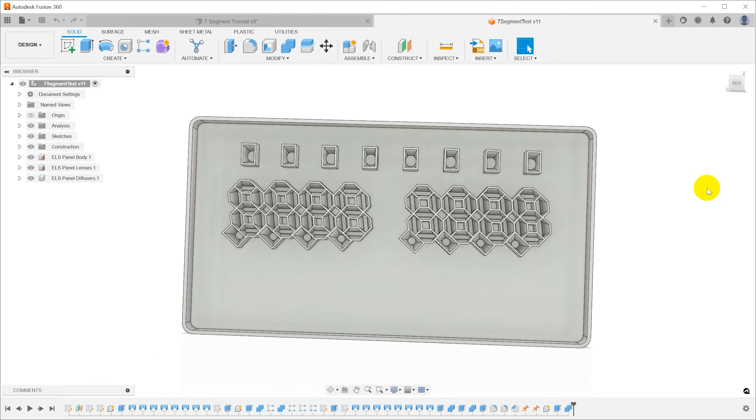Today we're going to take a deep dive into Fusion 360 and I will show you how I designed these 3D printed 7-segment display panels.

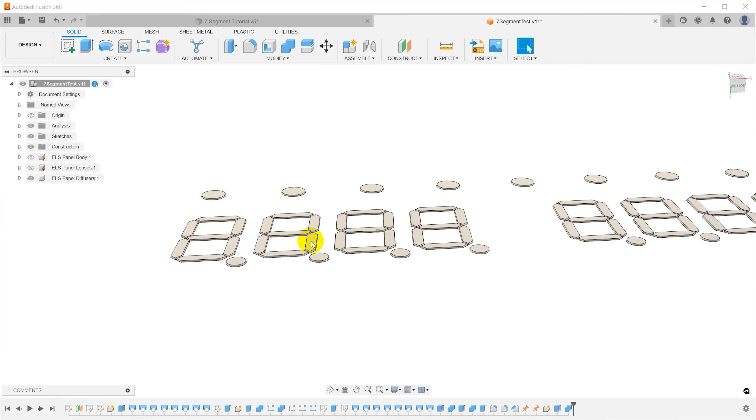Last week I spent some time testing the Bambu Lab A1 Mini 3D printer and I used these display panels as a challenging test to see what the printer could do. These panels have 3 different materials: black PETG for the body of the panel itself, clear PETG for the lenses of the 7-segment displays, and a single layer of white PETG behind that as a diffuser. This was not a simple part to model, and in the video last week I completely glossed over that process, but today we're going to look at how I did it step by step. Stick around and maybe you'll learn something interesting.

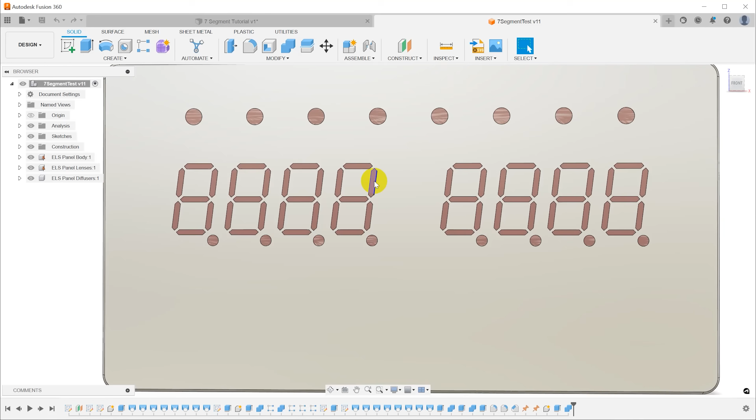This is the part we're going to model, and we need to first establish a bunch of geometry. We're going to need a sketch to lay out the segments of the digits, and we're going to need a sketch to lay out the shields on the back. It's a pretty complicated sketch, but we'll start with the simple core of it and add the complexity as we go.

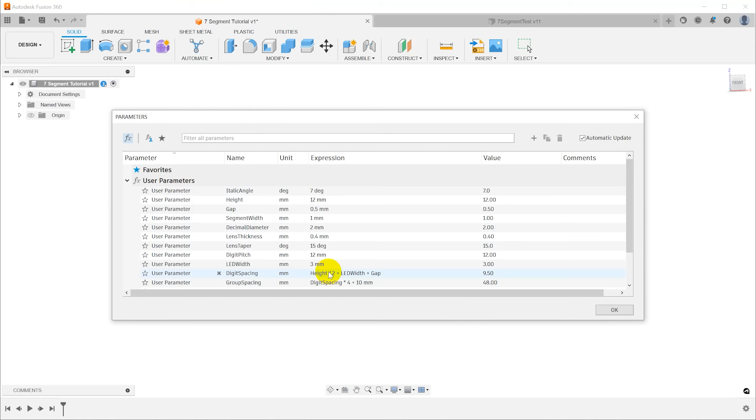The first thing I did is I defined a bunch of parameters. I want to be able to come back later and change the size of the digits or maybe the angle of the digits. So I've got the italic angle in here, 7 degrees. I've got the height of the digit, 12 millimeters. I've got the gap, that's the gap in the corner between the segments, set to 0.5 millimeter. I've got the segment width of 1 millimeter, and then a bunch of other parameters we'll use later in the modeling. I worked through this once and figured out what these needed to be, but I did it progressively, starting with just the angle, height, and gap, and adding more as I went.

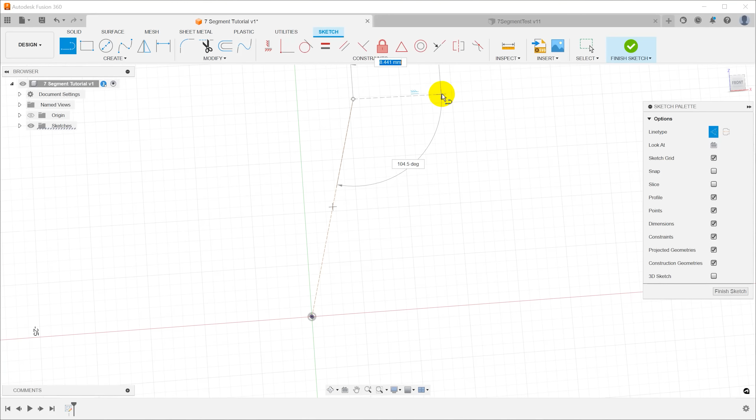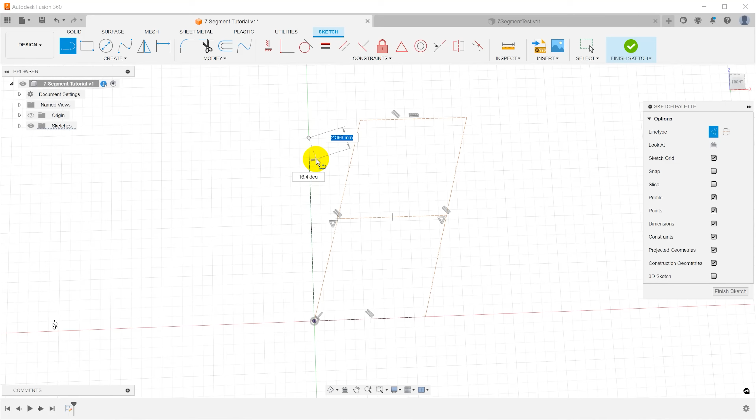So let's start with a sketch and set up the basic shape of the digit. I'm going to hit L for line, X for construction, and draw the shape of the digit. As I move this back and forth, you can see it snaps into position with a parallel constraint, making those lines appear parallel, so I don't have to come back and add that constraint later. Now I can find the midpoint and draw the center line across, snapping to the midpoint, and now we have the basic shape of the digit. I'm also going to put in a vertical line here, hit escape to stop drawing, and start putting some dimensions on this.

So D for dimension, and the first thing we'll set up is the height. Then I want to make the width half of the height, so height divided by 2. And the italic angle we can set between this vertical line and the side of the digit. Now we have the basic shape. Of course, I can come back here and modify the parameters at any point. If I decide I don't want 7 degrees, and I want, say, 9 degrees, I can just change that and the angle will change. I'm going to leave that at 7 though.

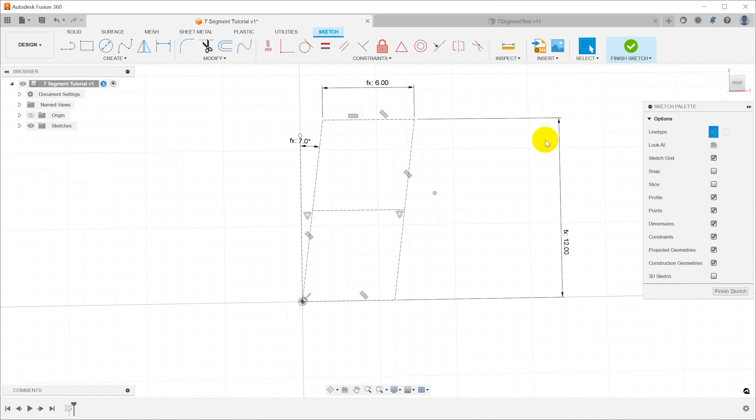I think that looks nice. And now we need to define the borders of the segments. So I'm going to do that with the offset.

Hit O for offset. Chain selection is turned on. So if I select the outside of this, it's going to offset at some distance. I'm going to turn off the construction line, so this will be solid.

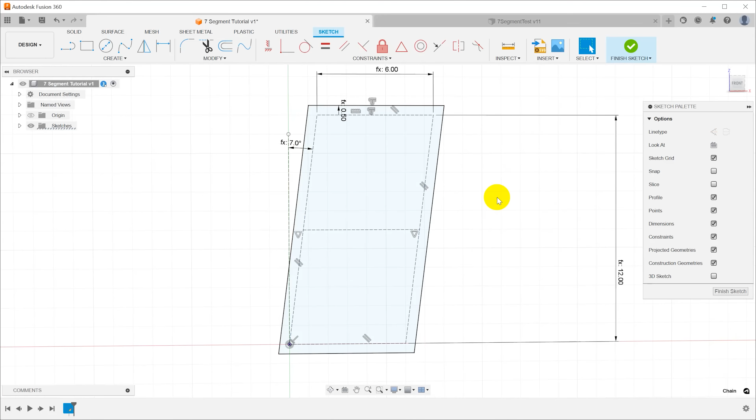And then the distance that I want is going to be the segment width divided by 2. And I will offset to the inside minus segment width divided by 2. And that gives us the width of the segments.

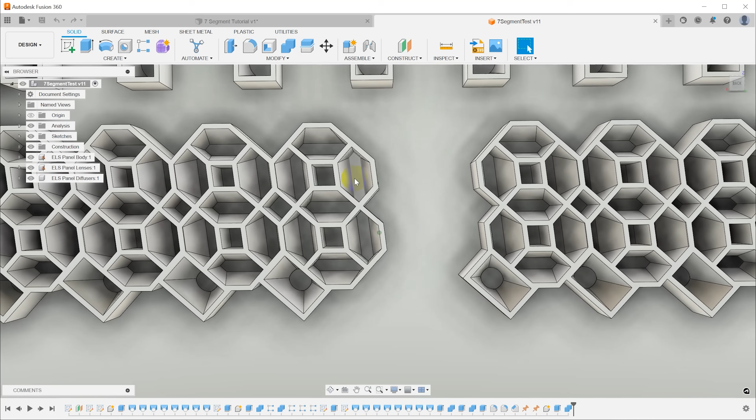Now there's more going on here, right? That gives us the inside and outside lines of these segments, but there's more than that. The segments through there, I need the inside and outside width of the pocket for the LED. And then I also need another border even further out from that to cover the thickness of this wall.

So we'll go ahead and add those. Offset again, in this case, the LED width divided by 2. Offset minus LED width divided by 2.

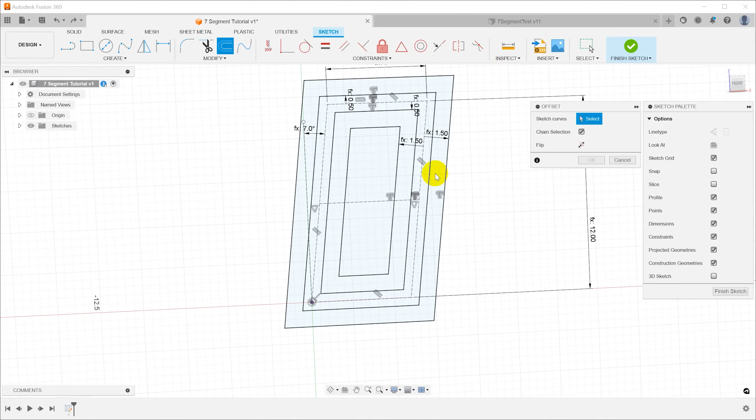And then we need the wall out beyond that. So that will be O for offset, LED width divided by 2, plus the gap. And offset the other direction as well, minus LED width divided by 2, minus the gap.

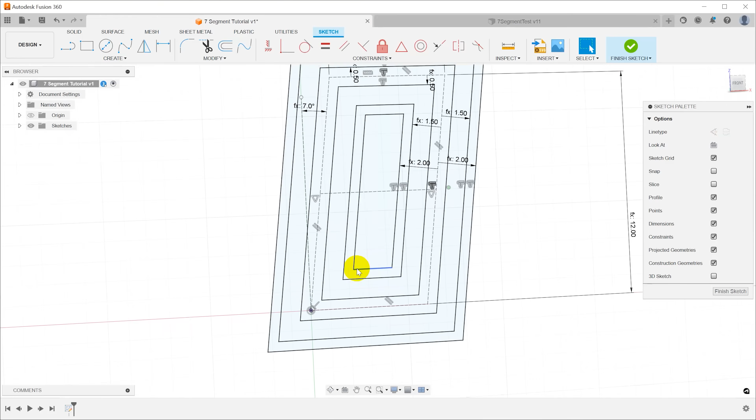And that gives us all of those borders, at least around the outside. We also need them on the inside here. So I'll do exactly the same with this center line, offset.

Okay, that gives us all of the borders. Now around these segments, we need to draw in these diagonal lines that will give us the gap.

And we'll start with just some construction lines. I'll hit L for line, X for construction, and we'll just go corner to corner across these guidelines that we started with.

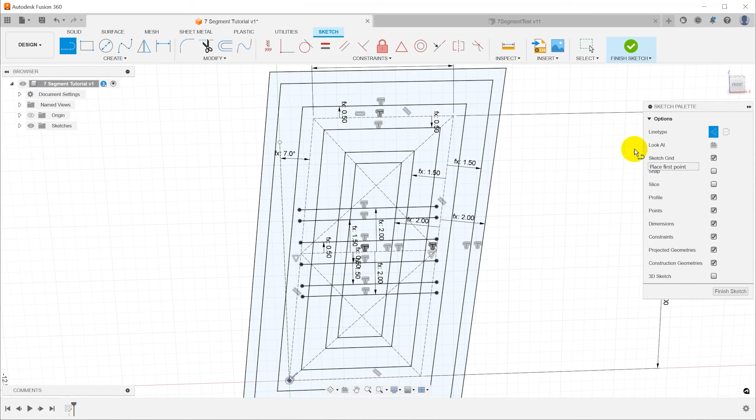And then we need to offset from those half of the gap on each side to then define the segments. So we'll turn off the construction, offset, gap divided by 2, minus gap divided by 2. I'll just do this for all of these lines.

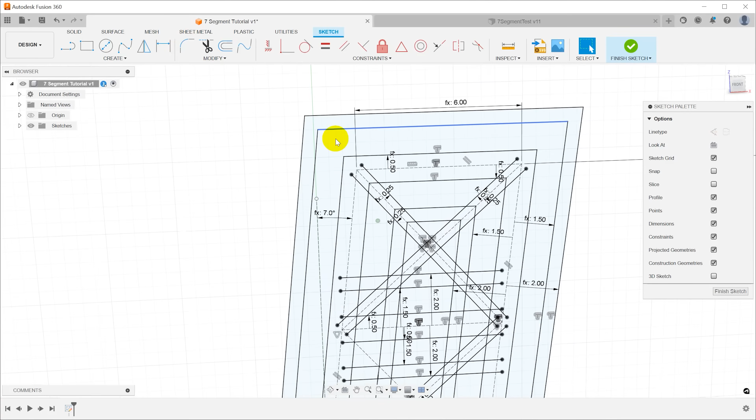Now this is starting to get really messy, but don't worry, it's going to get even messier. So we need to define the other side of these segments, and to do that we need some points. So I will say create point, and I'm going to come in here and put these points where the corners of the segments will be.

So where these gap lines intersect with the center guideline. Now it looks like I missed a couple.

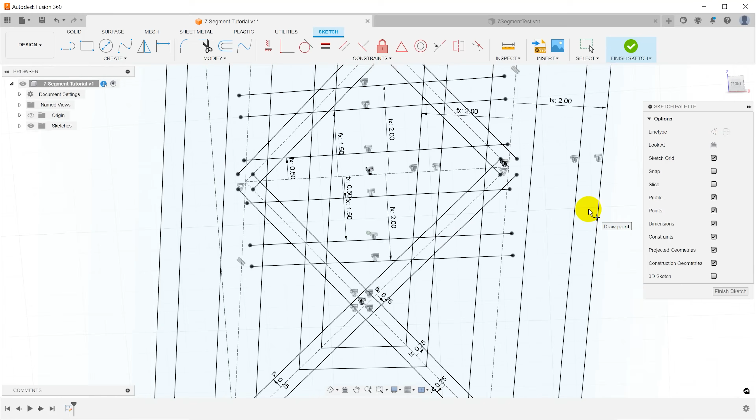And now I need to come back and define the other side of the segment. So the segment is in this region here, and there needs to be a line across here. So hit L for line. And what I'm going to do is I'm going to pull it all the way out to here because I know I need it to come this far.

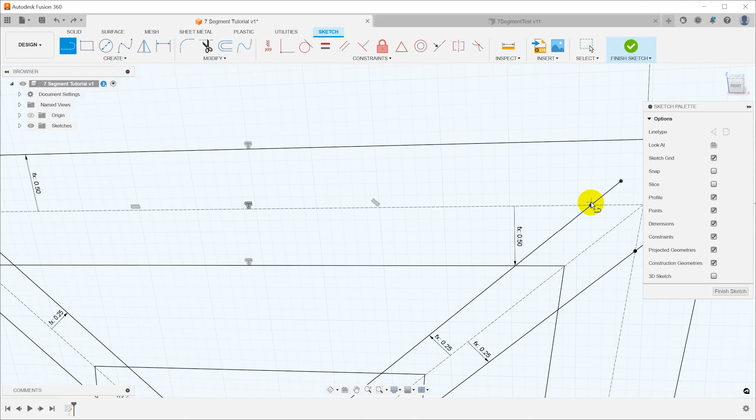And I'm not snapping it parallel to anything. I want to come back and do that later. So I'll just go ahead and put all of these in.

Okay, I think that's all of those. And now I'm going to come back and click on the parallel constraint, and I'm going to bring all of these lines parallel to these center guidelines. And I put them in there without any constraints initially, just because it's so hard to get them to snap to the right other line in something that's this busy.

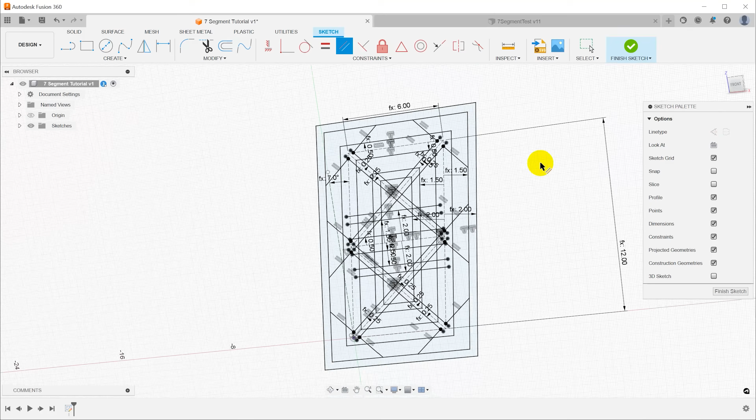But when we come back and do this after the fact, we can be selective. And the last thing we need is an outer wall, just like we've got this outer wall that's going to go around the outside of the pocket for the LED. We need to define this line that's on the outside edge of this wall. And we're going to do the same thing, just put it in without any constraints, and then we'll come back and constrain it.

Okay, so we'll say parallel. And then we'll hit D for dimension, and we'll offset this from here, the gap. And do that all the way around.

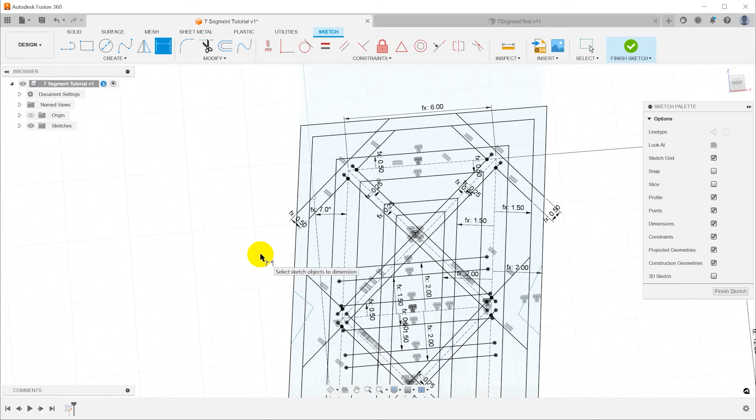Now for these lines that cut in on the side, again, that's these two lines right here. Fortunately, we know those need to line up with the inside ones, so we can just use a collinear constraint. And I can just click those and line those up quickly without any measurements.

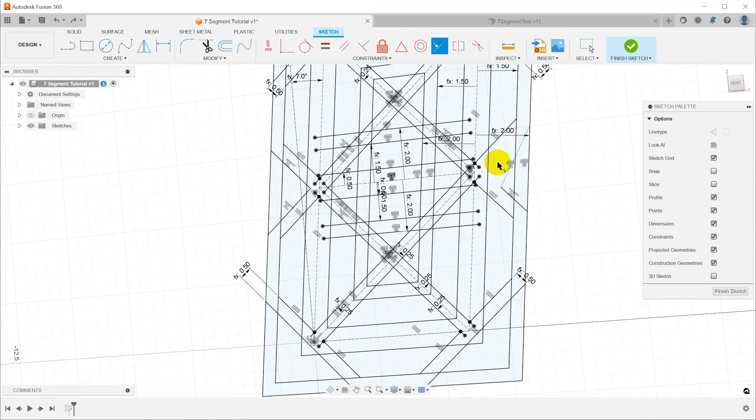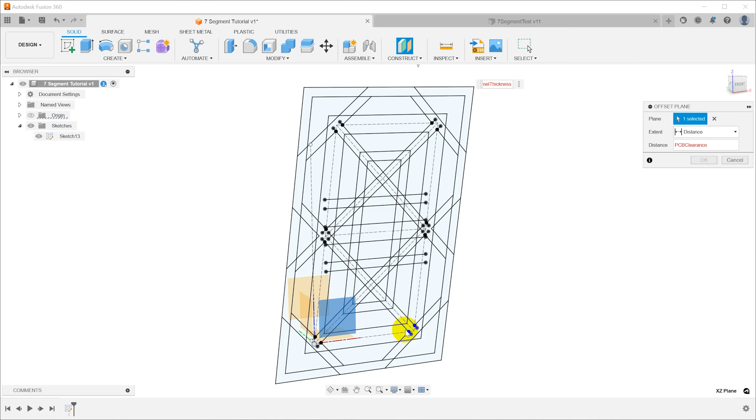Now that we have this completely unwieldy sketch with everything in it, let's create some simpler sketches and just project some of these lines into it to make our job easier. I'm going to start by creating another plane, offset by the PCB clearance plus the panel width and panel thickness, which creates another plane on the back. The sketch is on the front plane, and this second plane is the back end of these extrusions.

I'm going to create a sketch on that back plane, hit P for project, and we're going to project some of this geometry back there—not everything, just the outline that we actually need to extrude.

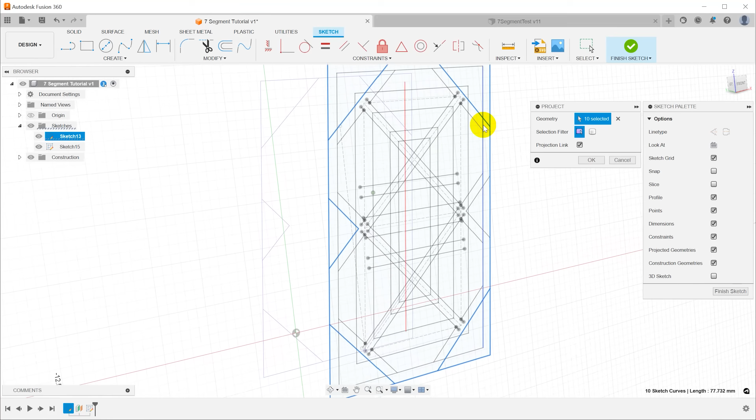Okay, that's one sketch. I'm going to hide that one and create a second sketch back there as well, and project more geometry onto this second sketch.

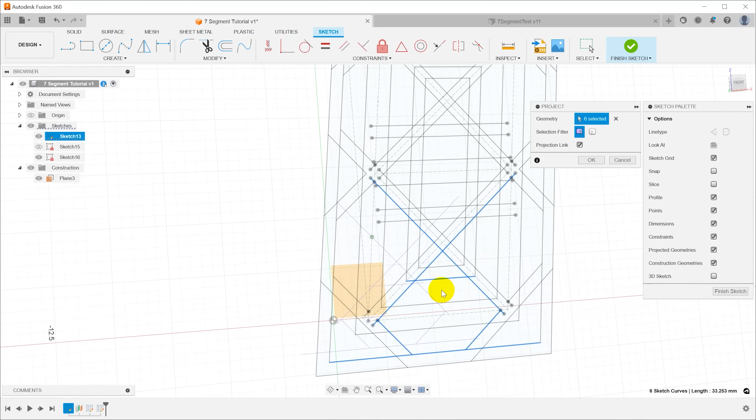Specifically on this second sketch, what I'm projecting is the geometry I need to carve out the holes for the LEDs. And I think that's everything I need for that.

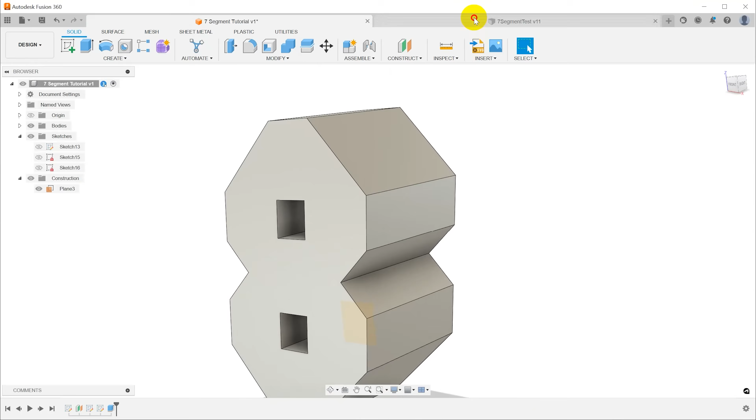Okay, so let's turn on just this back sketch. I'm going to select the regions here that I want to extrude, control-click, hit E for extrude. Extent type, I'll say to object, click something on this front plane, and if I turn the sketch off, you can see that extrudes a solid block of plastic, which is the material that's going to completely surround these shrouds on the back.

Then if I turn the front sketch and that third sketch we did on the back on, that gives me everything I need to loft the openings. So this is a segment on the front, and on the back this is the opening for the LED.

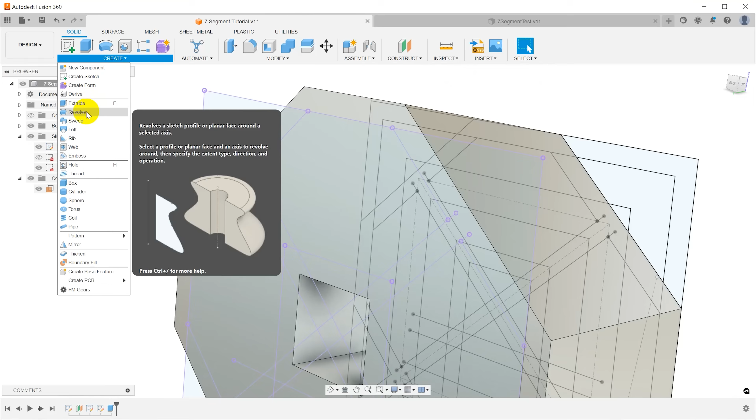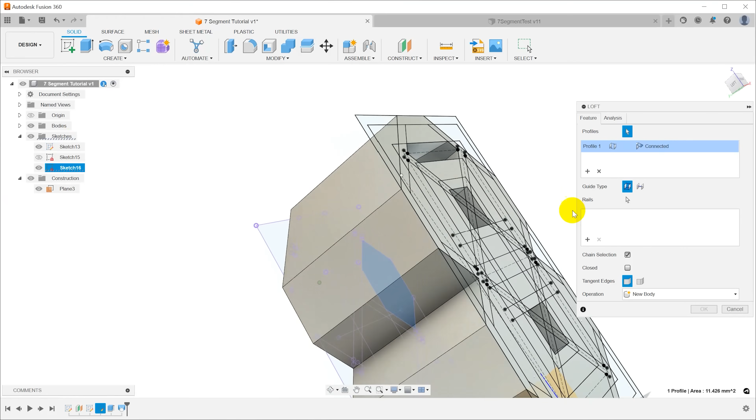So I can come up here and say create, loft, select the segment on the front, the opening for the LED on the back. It'll default to cut, click OK, and it will carve out that tapered opening from the front to the back. Then I can just go through and do exactly the same thing again, lofting from the back in this case to the front, and we'll go through and do all of these.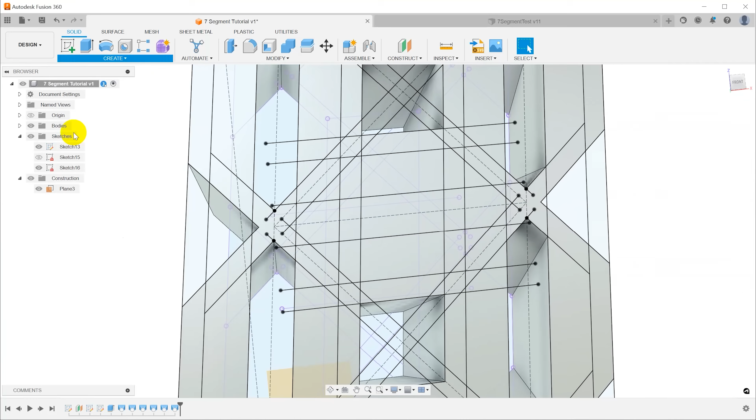Now the one in the center is a little bit more complicated because of all the extra lines in here—there are a bunch of different profiles. So I'll start and say create loft, click one of these profiles, and you see it's created a single profile here in the loft command. Now I'll hold Control and click the rest of the profiles I want included on the front side, and you can see there's still only one profile.

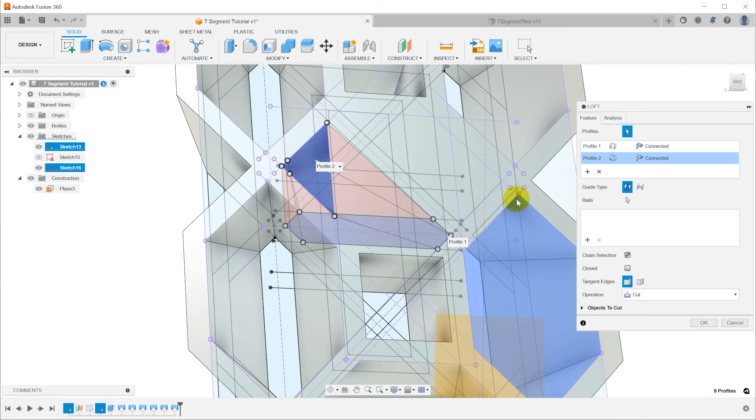Then we'll flip around to the back, and I will not hold Control—click, that will create a second profile. Now I'll press Control and select the rest of the profile, release Control, click OK, turn off the sketches so you can see what's going on, and that has carved that segment through to its LED pocket on the back.

So we have all 7 segments carved through the back with these tapered openings, and that's exactly like what we have on the back of the finished panel here. Well, that was by far the most complicated part of the model, and the rest of it should be relatively easy.

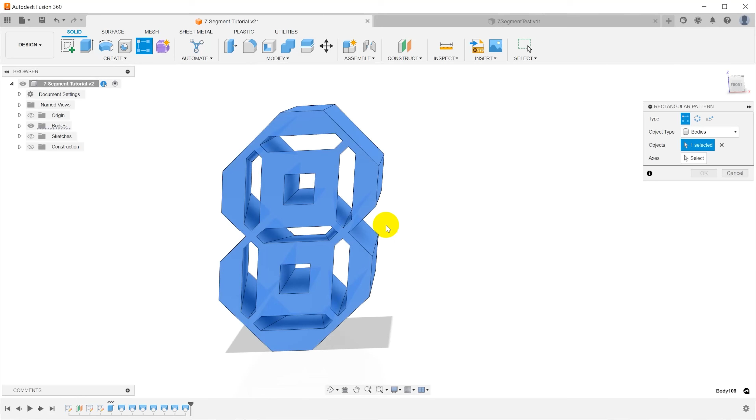So I don't want just one digit, I want 8 digits in 2 groups of 4. I'll come up here and click rectangular pattern, pattern bodies, select this body. On the axes, I'll select this bottom line because I know that's horizontal—actually, instead of that, I'll go ahead and select the x-axis here.

And I want to distribute these by spacing. I want 4 of them, and the distance should be the parameter I already calculated, which is digit spacing. Okay, and that gives me 4.

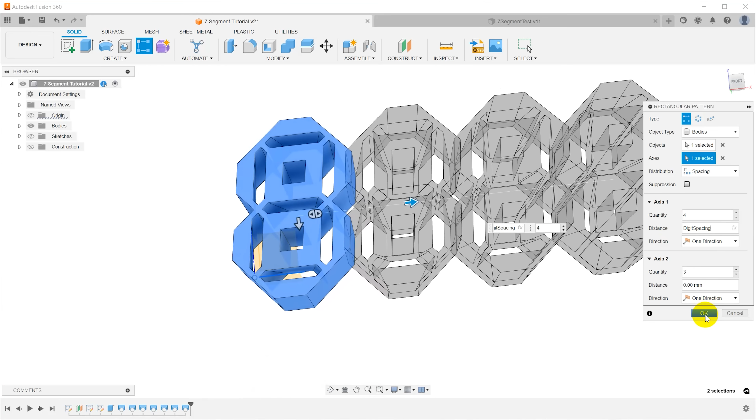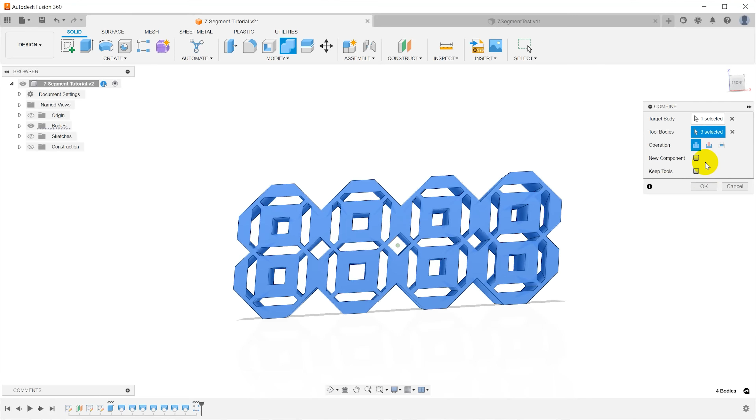Now these are separate bodies—you can see they're overlapping right here at the wall. So to join these together, I'll click Combine, Target Body, select the first one, Tool Bodies, select all the rest of these, and I want to join. I don't need to keep the tools. Click OK, and now we have a single body with 4 digits.

If we come over here and look at our bodies, there's only 1. So I can do exactly the same thing to make another group—object type bodies, select this body, axes, we'll select the x-axis. In this case, I want 2 of them.

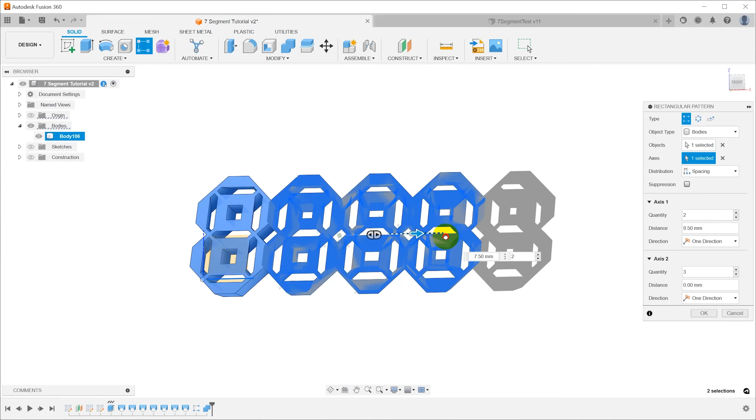And I'll just drag that over. I think I have a parameter for that, but it doesn't really matter. So there are 2 groups of 4 digits each.

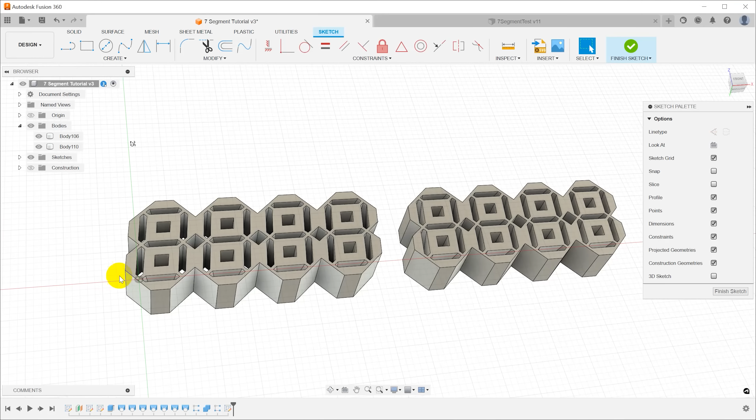The next thing I want to do is put these into a panel, and to do that, I need a sketch. So I'll say create sketch, and I will select the front of this. Now I do need the geometry here, so I'll hit P for project, and I'll click on the front faces of both of these so that the geometry will be included.

That'll allow me to do fun things like creating a line. So hit L for line, line type construction, and I'm just going to draw a diagonal line across between these, and that way I'll have a midpoint here, and I can drag up that midpoint and just hit escape. We'll use that here in a minute.

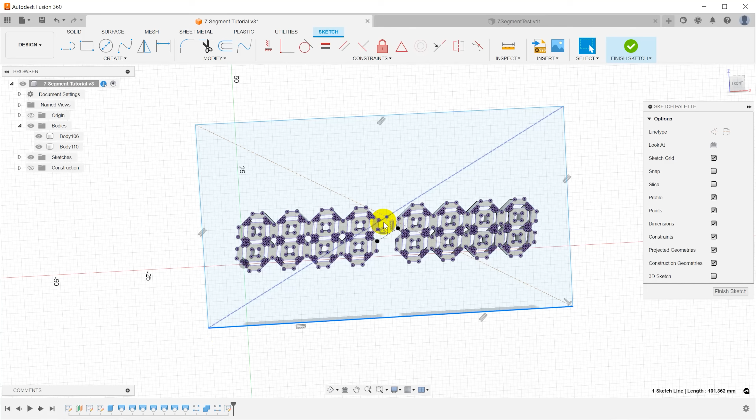Then I can come up here and say create rectangle, and I'm going to create a center rectangle and use that point and drag out and create something that looks sort of like a control panel. I can move this up and down to where it needs to be, and see that center point that's going to be centered between the digits is moving around, and I can define this however I want.

Let's go ahead and put some dimensions on it, say 100 millimeters by 60. And then we can define the vertical position.

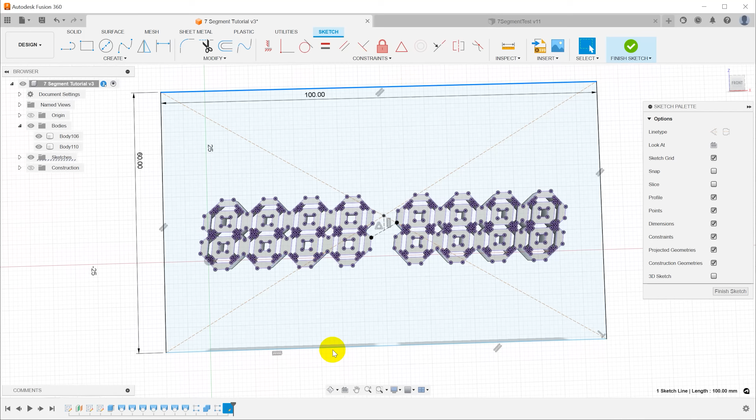We'd like to put this in a place where it'll be repeatable and can be controlled. So I'll just put that about where I think it should be, and then we'll just throw a dimension on this line. D for dimension. And we'll just call that 8 millimeters.

And the only reason I put that on there is so that everything will be locked down and we can come back and move that later.

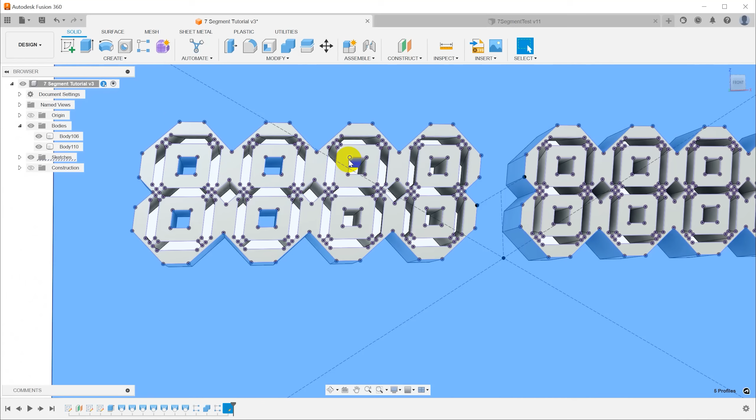Okay, finish sketch. I can select this region, and then I'm going to control click the profiles in the center of the digits because I don't want those holes.

Hit E for extrude. And it looks like we're going in the minus direction, so I'll say minus panel thickness, and we'll make sure that's set to join. And now we should have a single body that has all the geometry we need.

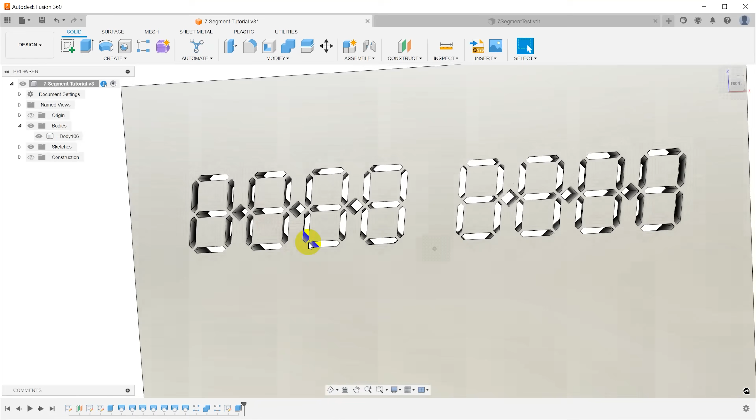And it looks like I missed these holes, so let me double click to reopen that, and I'll just come through and control click those diamonds as well.

And that gives us a panel with the digit openings with the shrouds on the back that go down to pockets for the LEDs.

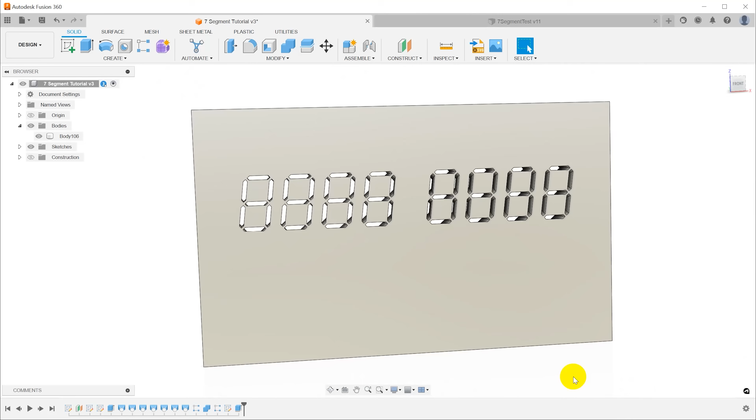Now I'd like to put a nice border around this, so we'll create a new sketch, put that on the back, project that surface, offset the side here by what? Let's call this 1.5 millimeters. Finish that. E for extrude. Distance to object, the same height as these, and give us a nice little wall around the outside.

And then let's fillet this. I'll select the whole bottom surface here and say 1 millimeter. That looks nice.

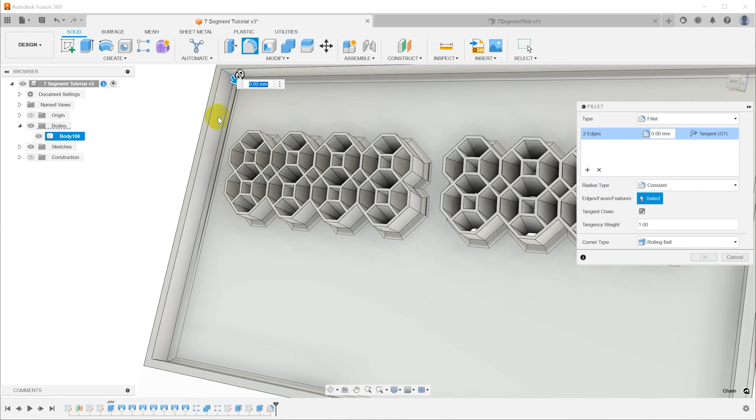Now hit F for fillet again. We'll put some fillets around the outside, and on the inside I'll make these say 2 millimeters. And I'll do the same thing on the outside and make those the same 2 millimeters plus the 1.5 wall thickness. So 3.5.

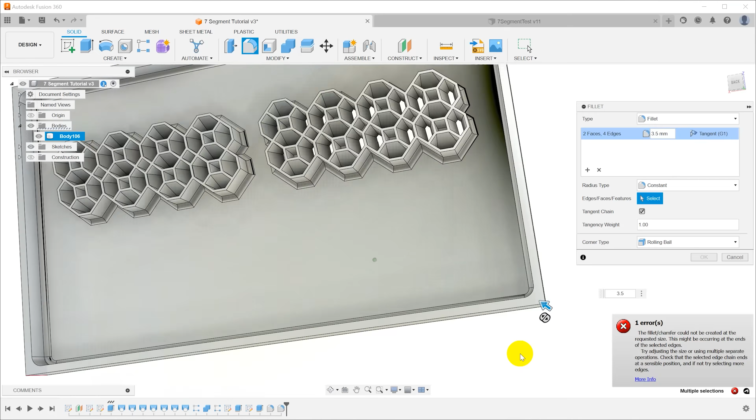Make sure I've actually got the lines and the corner selected. Okay, that gives us a nice panel.

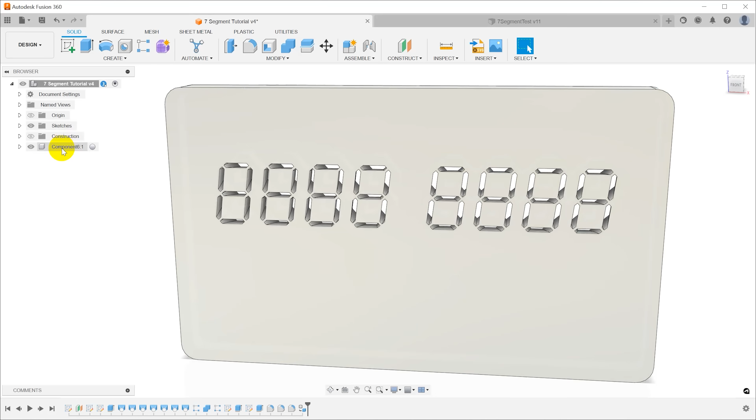Beautiful. Now that we have the panel with the openings for the digits in it, we need to model some lenses. And before I do that, I want to start using components here. So I'll right click on this body, say create components from bodies, and then I'll have a component here and I'll rename this panel. That will allow me then to create a new component for the lenses.

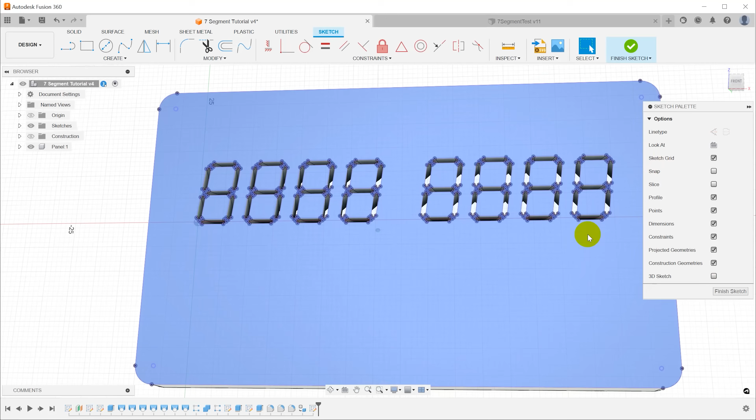To model the lenses, I will start with a sketch, and I'll put that on the front panel here, and I will hit P for project, select the front panel, and then click OK, and that will bring all of that geometry into the sketch. I'll just go ahead and finish that.

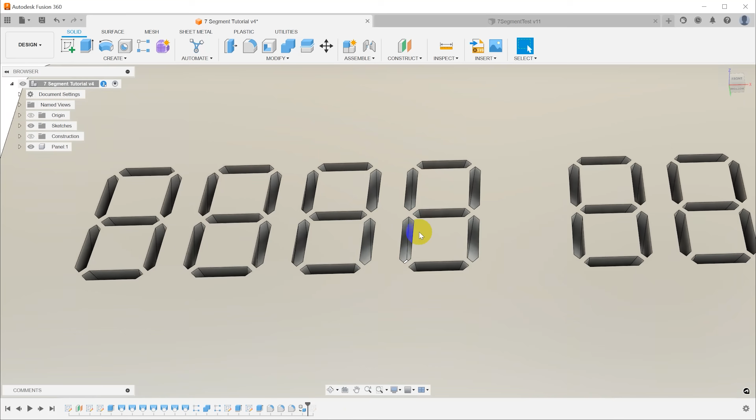Now having that sketch then will allow me to select these individual regions within the digits. Without that sketch, that isn't possible. So if I scroll back the timeline to before the sketch, you can see those don't highlight because there's nothing there. I'm just highlighting the things that are behind it. But if I have that sketch, then I can select those.

So let me select them all. I'm just going to click and control click and select all of the digits, or all of the segments in all of the digits.

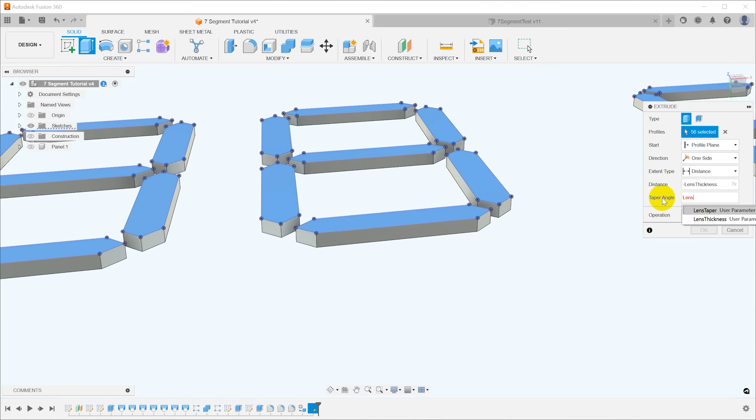Now with all of those selected, I'll hit E for extrude, and we want to go minus the lens thickness. Let me turn off the panel here so we can see what we're doing. That's extruding straight down. I'd like those to be tapered out, and I have a parameter for the lens taper. So instead of extruding straight down, those are going to extrude outward, and I want to say new component.

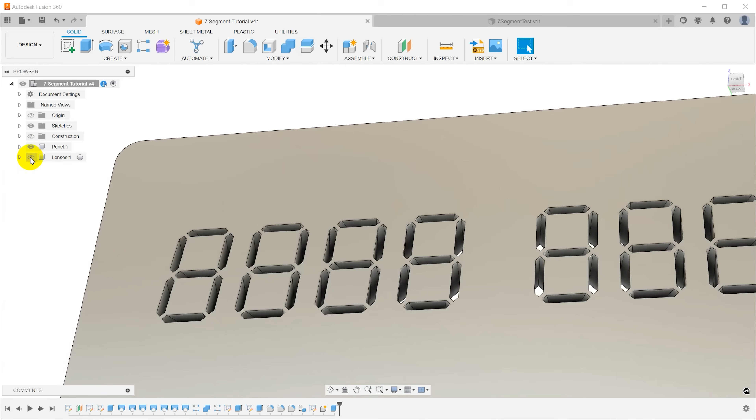Click OK, and that'll create a new component here, which I will call lenses. So I can turn on the panel, and I can turn off the lenses, and we can see that those are separate components. And within the lenses, there should be a whole bunch of bodies.

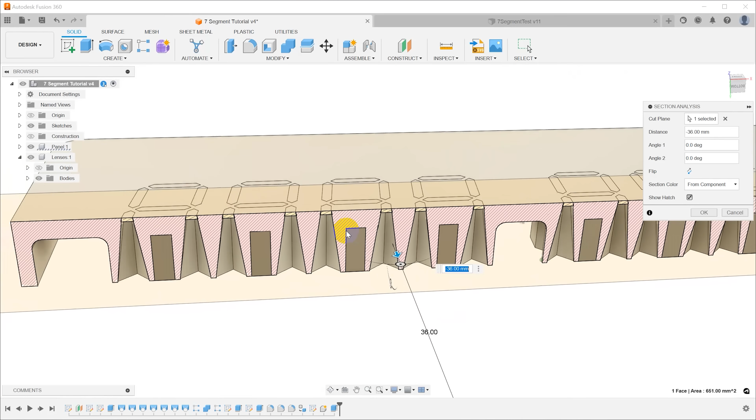Looks like 56 bodies. Now, if we say inspect section analysis, and click on the front here and just drag this back, and then zoom in here, you can see that the lens is overlapping with the panel. They're both occupying the same space. If I turn off the panel or turn off the lenses, you can see that they are overlapping.

The lens is actually keyed into this because the taper is shallower than the taper of the pocket. And I would like to make a cutout in the panel to accommodate for that.

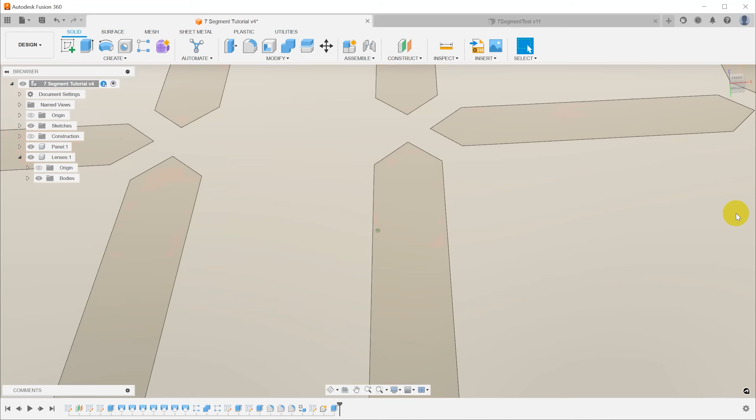So all we have to do is come up here to combine, and the target body will be the panel. The tool bodies, we need to open up the lenses, and I will click the first one, scroll all the way down, shift click the last one, and we have 56 selected, and then I will choose cut. And importantly, I want to choose keep tools so it won't delete the lenses. Click OK, and that should have done what we needed.

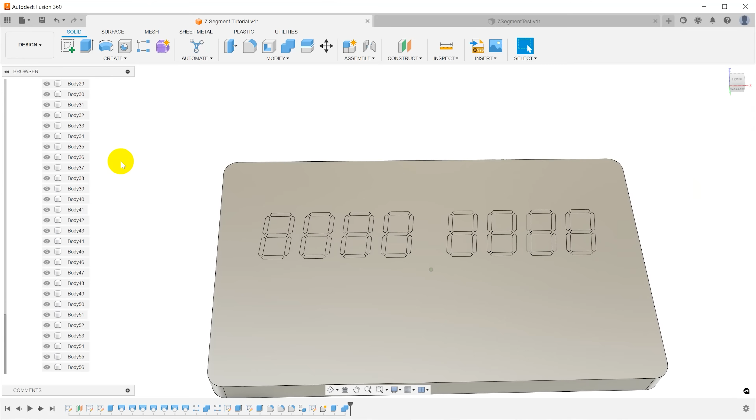So now if I turn off the lenses and we go in here and look, you can see that it's actually cut out a pocket for the lens to fit into. We turn the lens back on, it fits neatly into that pocket. And if we look at a cross section, you can see it more clearly. There's the pocket, and there's the lens that fits into it.

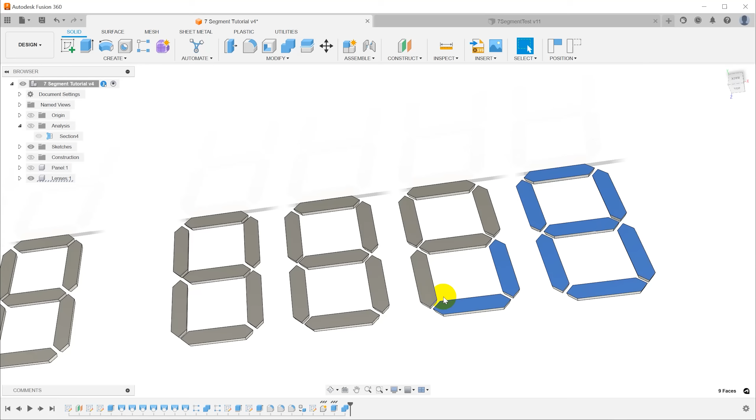And then if we want to put another layer on the back of this as a diffuser, we can just do exactly the same thing. I'm going to go ahead and leave that section analysis here and just turn that off. So if I just turn off the panel, then we can come back here and just select the backs of all of the lenses. I'm just control clicking to select all of these.

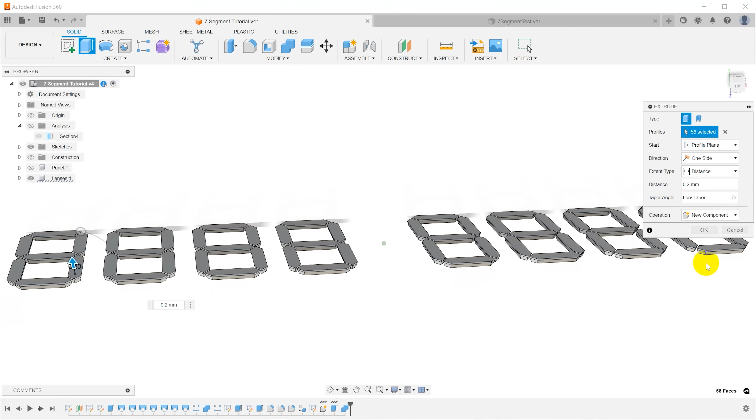With all of those selected, I'll hit E for extrude again. And for distance, I'm going to say 0.2 millimeters. I didn't actually create a parameter for this. I probably should. Same lens taper. And the operation is going to be, again, new component, so that it will create a new component for the diffusers. And I'll rename the new component it created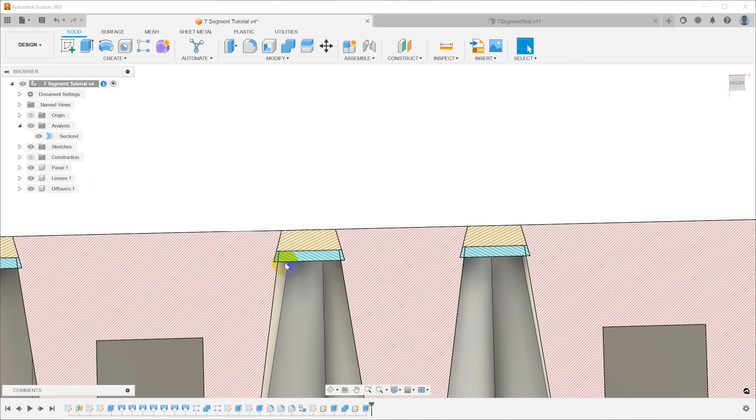Diffusers. So now we've got the lenses, the diffusers, and if I turn on the panel and then turn on the section analysis, you can see we've got exactly the same situation that we had before. The lenses are cut into a pocket, but the diffusers are overlapping. So we'll do exactly the same thing here again.

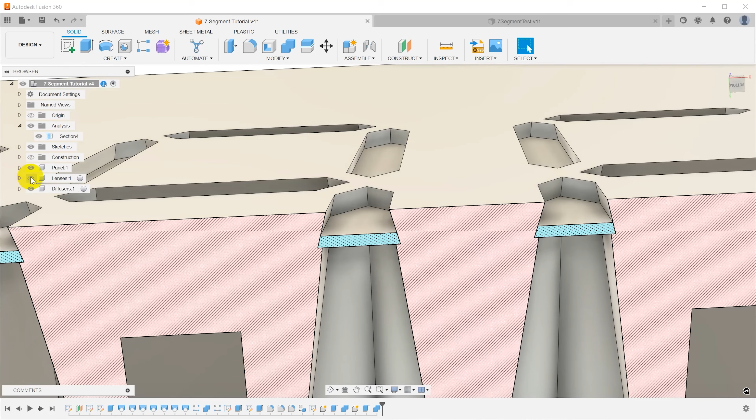Combine, target body is the panel, tool bodies, we'll open up the diffusers, select the first body, shift select the last body, leave keep tools on, and that will cut out a nice pocket. So we can turn off the lenses, turn off the diffusers, and you can see there's a pocket for the two of them to fit in there.

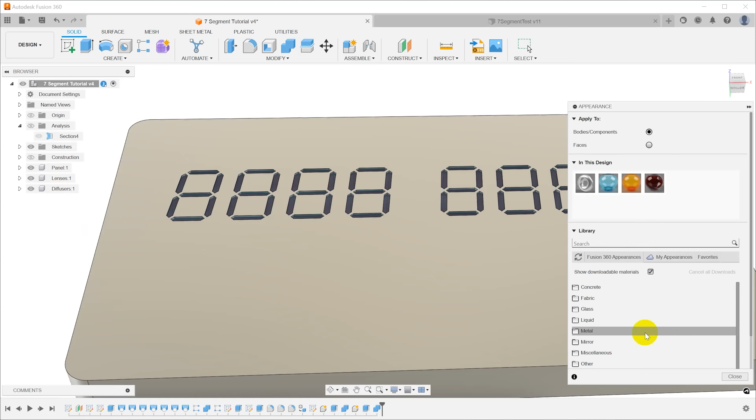Let me apply some colors to this. So I'll right click up here, choose appearance, and let's just take, here's a glass medium colored blue. I'll drag that onto the lenses, and the diffusers, phenolic amber, I'll just drag that on here. And there we go. So now you can see the difference between those. If we turn off the panel, you can see the lens, the diffuser, and the panel around it.

In the original video for this project, I also showed a block diffuser. If I turn off the panel here and turn off the lenses, these are the diffusers that I just made. These are one layer thick, and are behind the lenses. But I also created a version of this that had a block diffuser that was across the entire thing. And I'll just show you how I did that. So I'll roll this back.

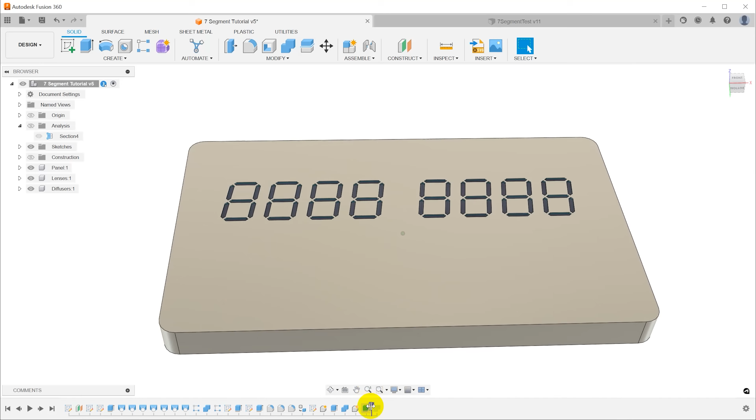Here is the extrusion operation that created the individual diffusers. I'll roll back before that, in fact before the component creation, and create a new sketch. We'll put that on the front plane here, and put a rectangle in the sketch, and that is it.

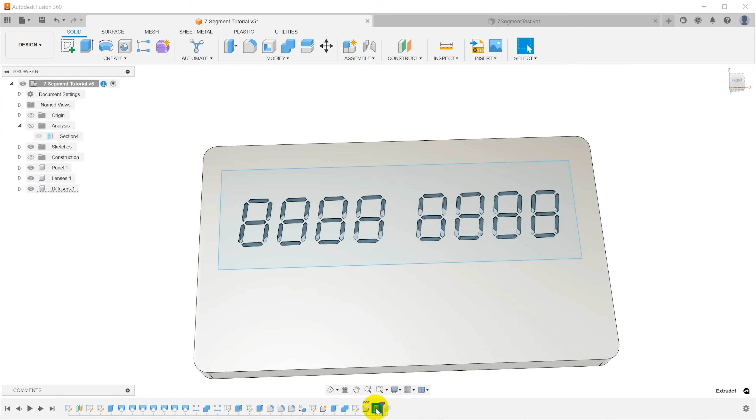Now we'll roll forward after that extrude operation. I'll double click that, and you can see right now we have 56 profiles selected. I'll just turn that off. I'll select this one profile, and then start.

I want to start from an object, and we'll go ahead and select the back of the lens. It'll be the same 0.2 millimeters, except we need to go minus, and we don't need a taper.

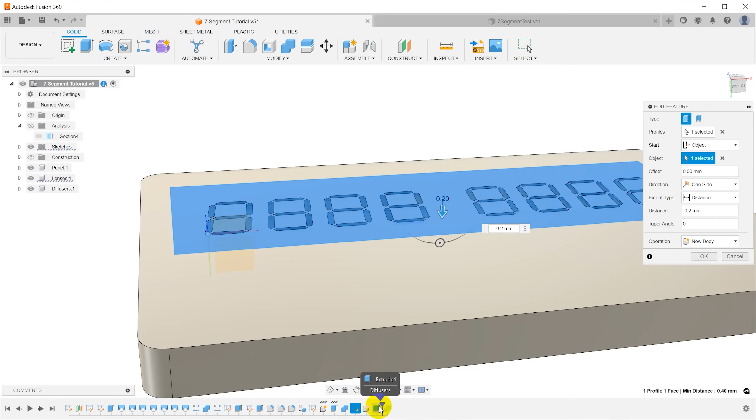And that will be a new body, because that new body is being placed in the component. When we created the new component previously, it created a component and then put the bodies in it. This, I'll just say new body, and this will leave us with the diffusers object with only one body in it. If I turn these off, you can see that's the large block diffuser. If I turn on the lenses, they're on the front of it, and the panel is around the outside.

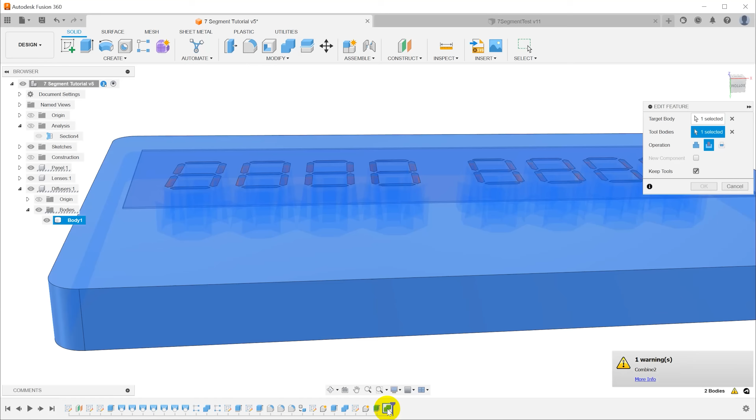We'll go forward across that combine operation. I need to double click and open that, because previously the tool bodies, there were 56 of those. Of course, those are all gone, there's only one left. So it's showing a warning because they're missing, but now that I've opened it, it's updated that selection. I can click OK, and you can see the warning is gone.

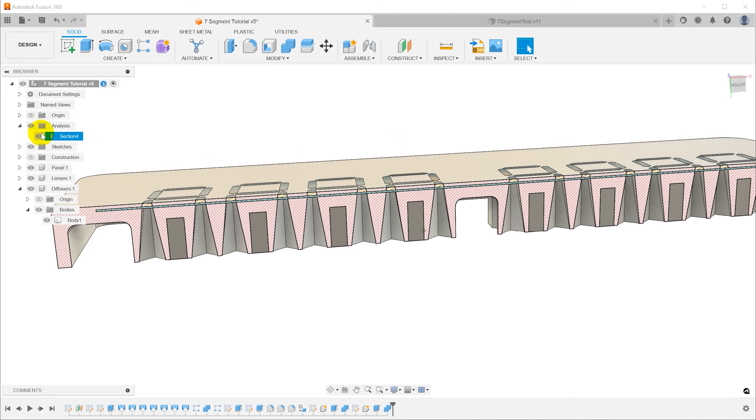And if we turn on the analysis here, you can see that the diffuser is all the way across, embedded in the panel. If I turn off the diffuser, you can see there's an empty slot in there to provide space for it to occupy. This thing should then be ready to 3D print.

Now, in the video last week, I did go through the process of showing how to do this. In short, we're going to use the components to output separate STL files. So we'll say File, 3D Print, choose my format as STL, and then I have to select something to output. You can use the components to do this simply.

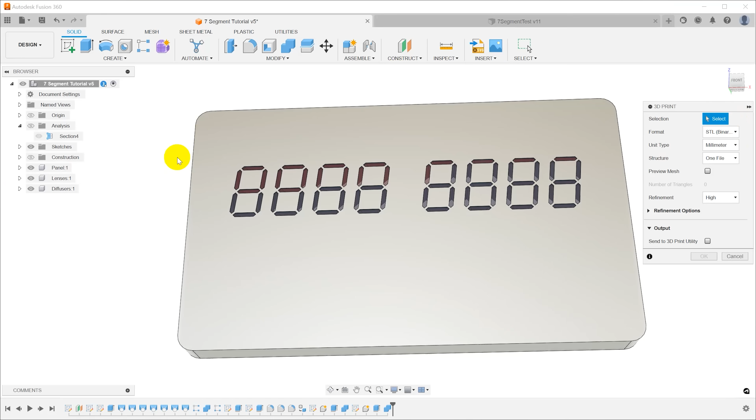So I'll select the panel, and output that as an STL file. We'll come back in here, 3D print again. I can select the lenses, and it will select all 56 of those bodies and output them in a single STL file. Then we can come back and do it again and select the diffusers, and it'll either be the one body we have here, or 56 if we have the separate diffusers.

Now, I did get some questions in the video last week as to why I output them as STL. Why didn't I just say 3MF and just select everything? Well, you can do that.

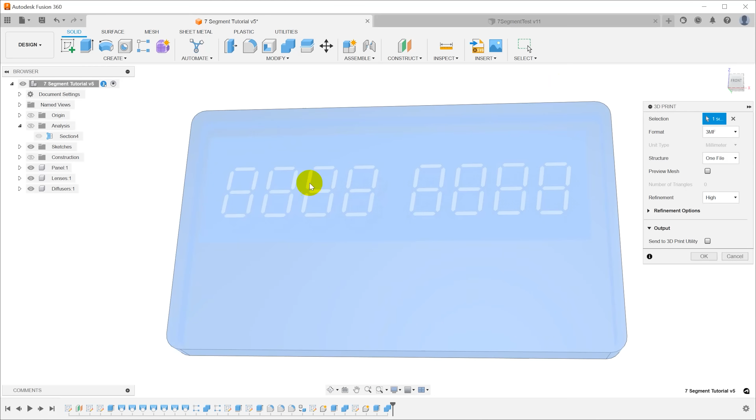If you output a 3MF file and bring that into Bambu Studio, that will work. However, every single body is going to show up separately in a flat list. So we'll have 58 bodies here, and you won't be able to just say, I'm going to select the lenses and make those a particular material. You'll have to go through and find all 56 of those lenses and set the material on them individually. There might be a way to do this with step files or something else that will maintain the hierarchy so you can select just the lenses and apply something to all of the bodies. I couldn't figure out a way to do that, so I just did it with STL, and this is a pretty safe way to do it that will work in pretty much any slicer.

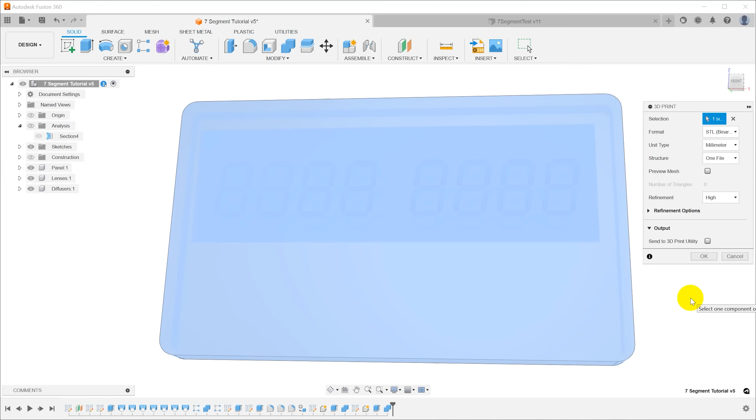For the details of setting up the slicer and the different materials for the different objects or bodies, check out last week's video. Again, I went into all the detail about how to assign the materials and how to have different settings for each material. I hope you found that useful.

Not everyone loves a deep dive into the CAD, but I know I do. I learn a lot of new tricks and tips by watching other people work.